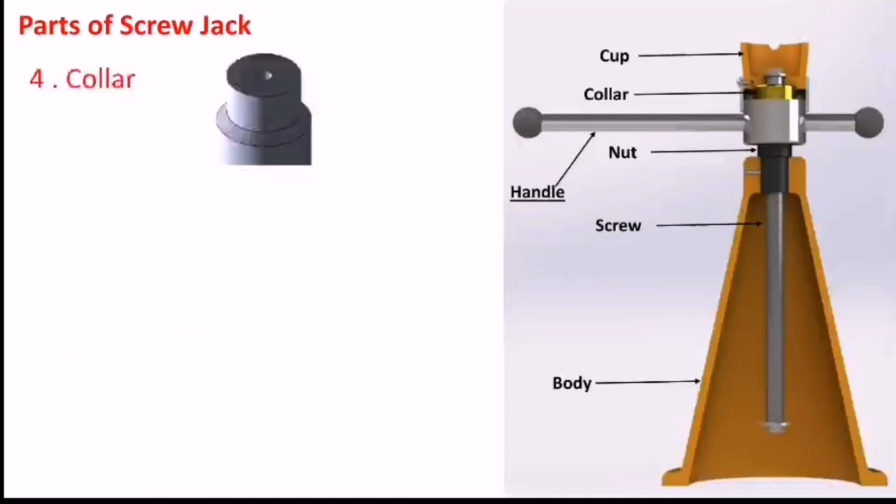Before starting the actual design, let us first see what are the parts of the screw jack. From the diagram shown on the right hand side, the first and the main part is the screw, on which the load is lifted. Second part is the nut. Third is the cup. Fourth part is the collar, the part between the cup and the screw. Next is the handle to rotate the screw, and lastly the body.

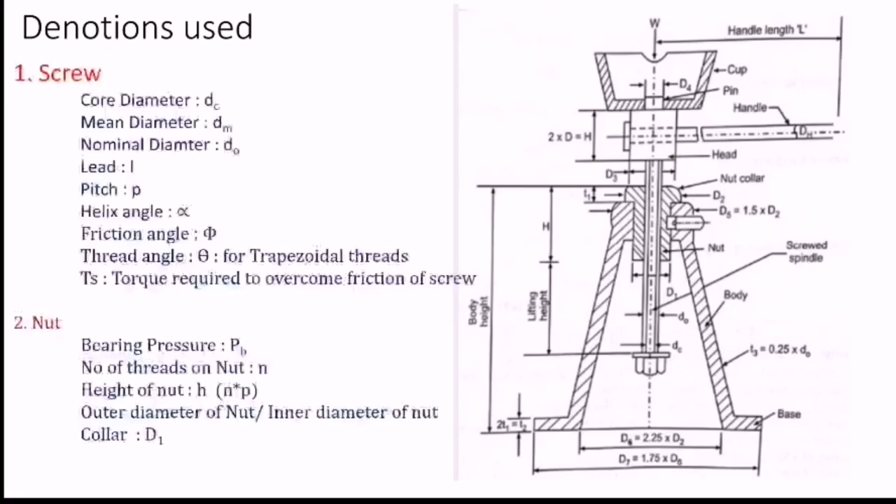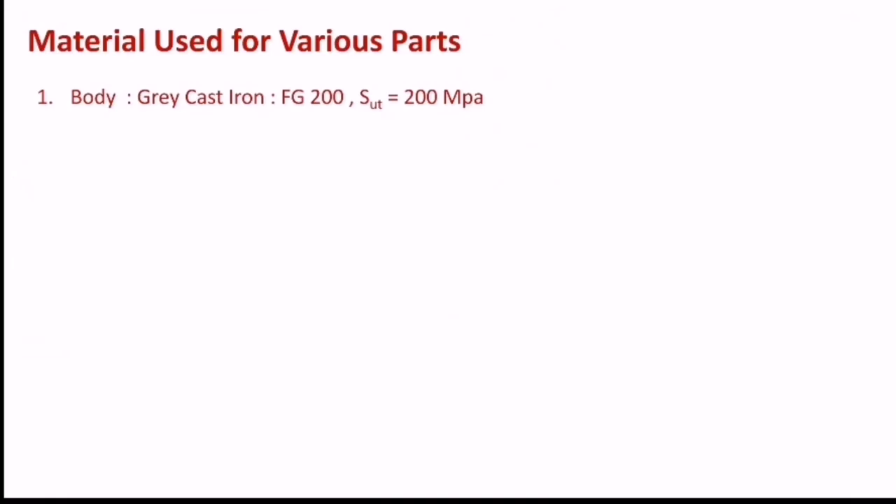For body, the material used will be grey cast iron having the ultimate stress as 200 MPa. Grey cast iron is chosen for the body because cast iron can be given any complex shape without involving major costly operations. It has higher compressive strength than steel. Hence, it is technically and economically the best material for the body.

Next is screw. The material selected for the screw is plain carbon steel 30C8 with yield stress as 400 MPa. Screw is subjected to torsion, bending as well as compression. Hence, plain carbon steel can be used. For nut, the material used is phosphor bronze having ultimate stress as 190 MPa.

Now, why phosphor bronze is used? Relative motion between screw and nut results in friction. The friction causes wear. If screw and nut are of the same material, surfaces of both will be worn out. The shape of the screw makes it costly compared to the nut. Hence, the nut should be replaced if required. Due to this, the nut is made of a softer material, that is phosphor bronze.

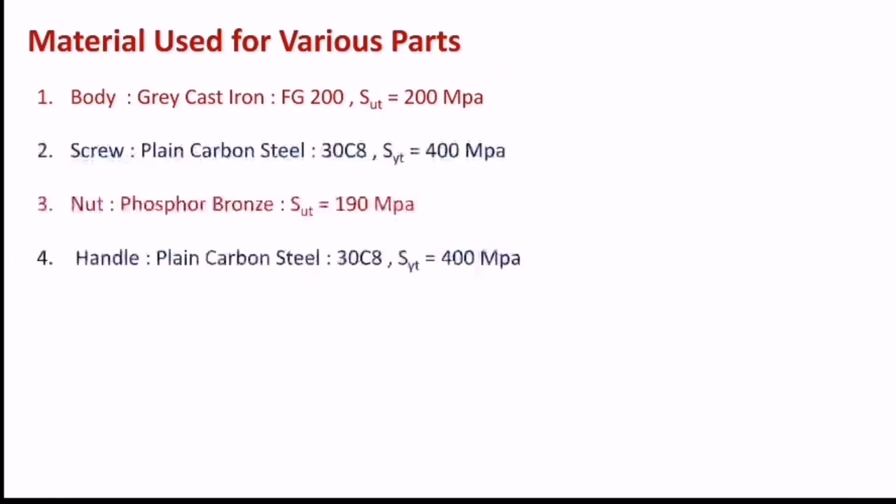Next part is handle. Handle is subjected to bending stresses, hence plain carbon steel 30C8 can be used. And lastly, the cup. The shape and design of the cup are such that it is easier and economical to make it by casting process. Hence, grey cast iron FG200 with ultimate stress 200 MPa is a suitable material for it.

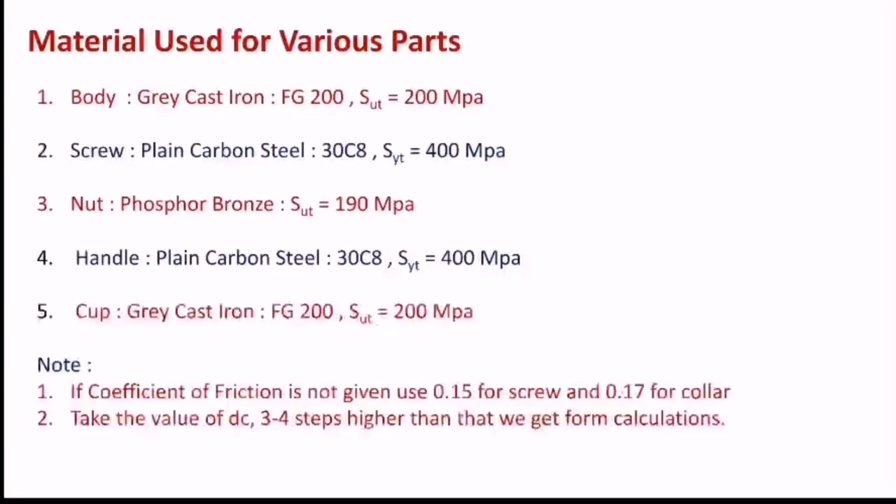Note, if in the question the coefficient of friction is not given, we will use 0.15 for screw and 0.17 for collar. Also note, while selecting the value of dc from PSG, we have to take the value 3 to 4 steps higher than what we got from the calculations.

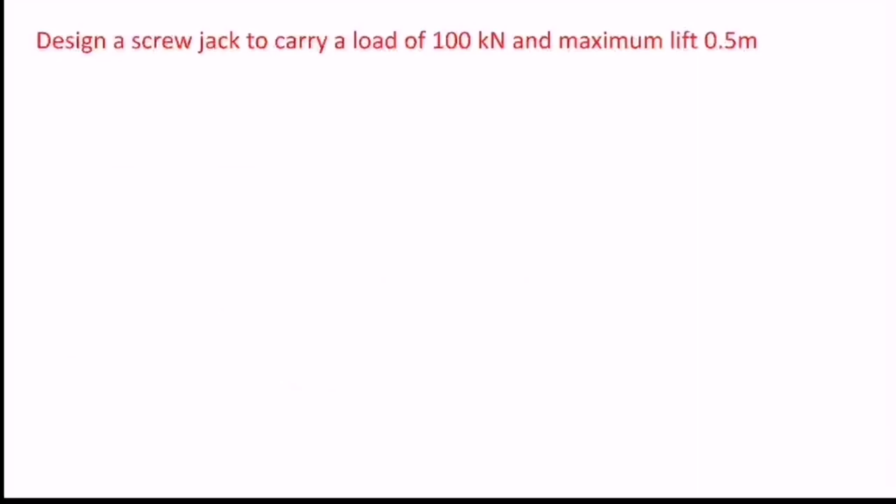Let us now understand the entire design of the screw jack through a problem. The question is, design a screw jack to carry a load of 100 kN and a maximum lift of 0.5 meters. We have seen the various parts of the screw jack such as screw, handle, cup, body, collar and nut collar. Let us start with design of the screw first. For the screw, the material is selected as seen previously. Using factor of safety as 5, I got sigma c allowable as 80 and tau allowable as 40.

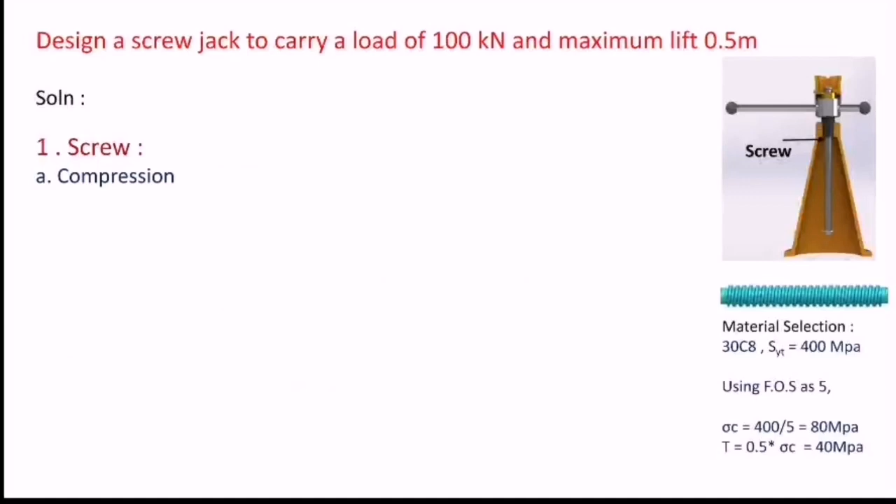From the figure, we can see that when the load is kept on this power screw, the screw will be subjected to compression, that is, compressive stresses will be induced. Hence, W = sigma c × π/4 dc². W is 100 × 10³, sigma c is 80. On calculating, dc is 39.89 mm. From design data book PSG 5.71, we take dc as 51 mm. Then do becomes 60 and pitch becomes 9 from the same row.

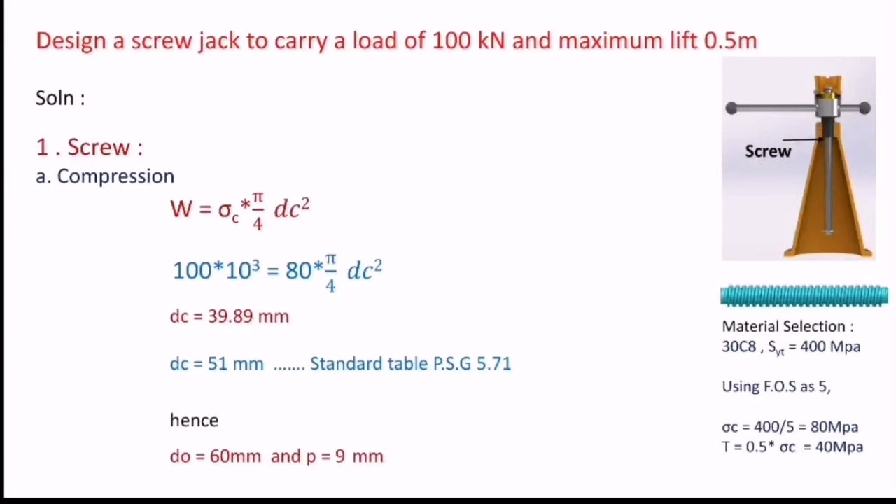Now, this screw along with compression is also being rotated. Because of the rotation, torsion or shear stress will also be induced. So we have the relation Ts = π/16 tau dc³, where Ts is the torque required to overcome the screw friction. Also Ts = W/2 dm tan(phi + alpha). To find Ts, we need dm, phi and alpha. dm = d − 0.5 pitch. On solving, I get 55.5 mm.

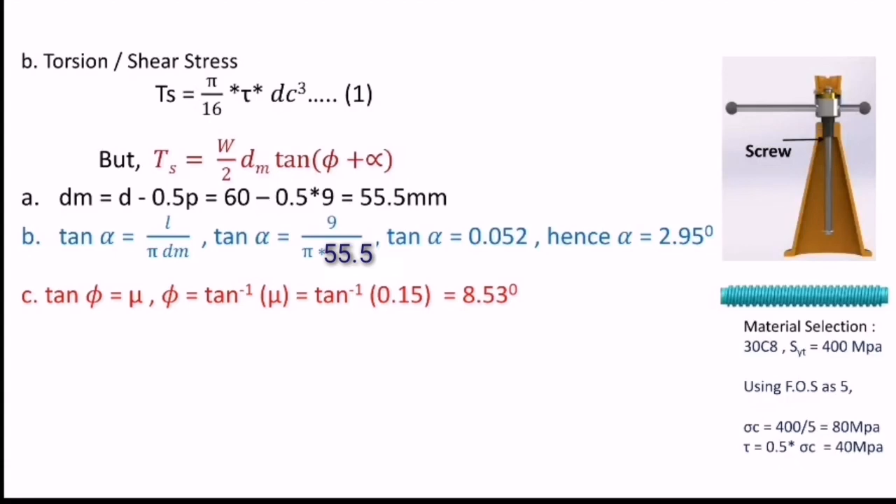Tan alpha is given by L divided by π dm. As it is a single start thread, L = 9. So tan alpha = 9 / (π × 55.5), which gives alpha as 2.95 degrees. Next requirement is phi. As the coefficient of friction is not given, we assume 0.15 because it is screw friction. On solving, phi is 8.5 degrees.

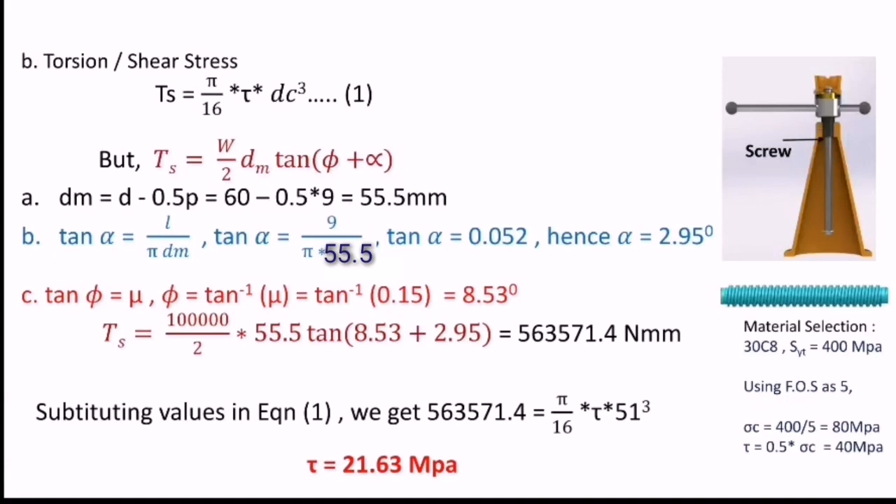Substituting all the values in the Ts equation, Ts is 563571.4 N·mm. Substituting this in equation 1, tau is 21.63 MPa. While calculating dc, we got 39.89. That means if stress is 80 N/mm², dc will be 39.89 mm. But we have increased dc to 51 mm.

So now we need to find, at dc = 51 mm, the stress induced in the screw. Hence I write again W = sigma c × π/4 dc². Now I know dc, so I substitute dc as 51 mm. On solving, sigma c induced is 48.95 MPa.

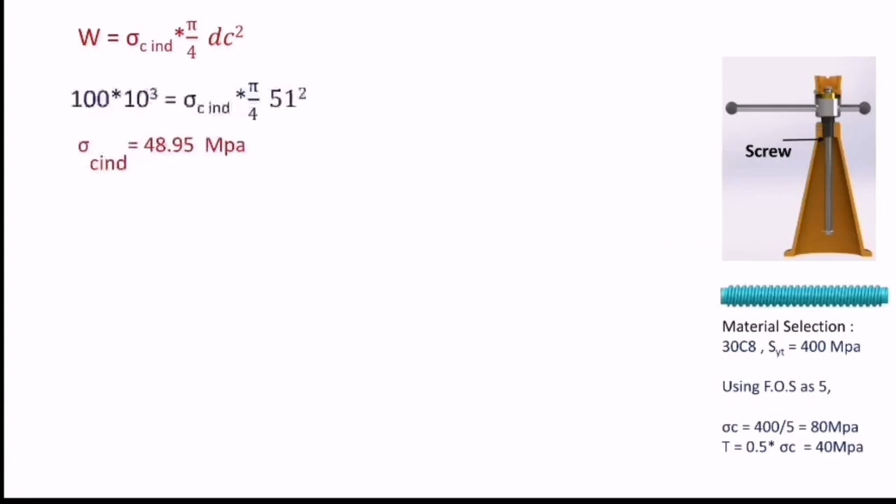As the screw is subjected to compression and shear at the same time, we have to find the resultant stress induced in the screw. According to maximum shear stress theory, tau max = ½ √(sigma c² + 4 tau²). On solving, tau max is 32.66, which is less than the allowable limit of 40 MPa in shear stress criteria.

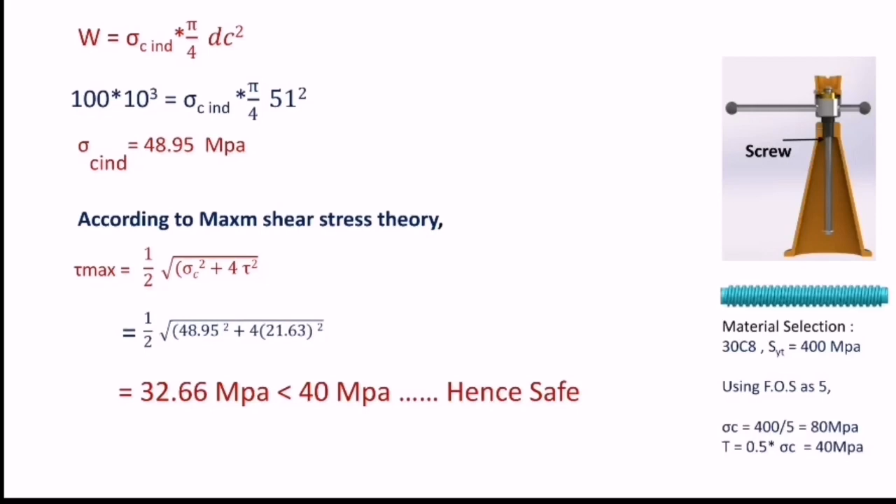According to maximum normal stress theory, sigma max = ½ [sigma c + √(sigma c² + 4 tau²)]. On substituting, sigma max is 57.13 MPa, which is less than the permissible stress of 80 MPa. As our screw is safe in both criteria, our design for the screw is safe. With this, we have designed one part of the screw jack, the screw. We will continue with other parts in the next lecture.